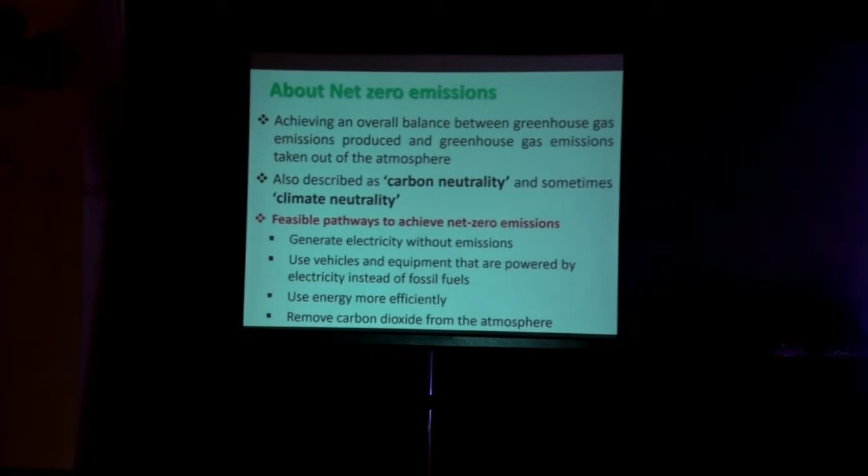This net zero emission is also as important as the energy and production scenario, and presently it is more important to know about the energy net zero emissions. Here I have covered the global and national level of this net zero race. Net zero emissions means achieving a balance between the GHG emitted as well as taken out from our atmosphere. This is usually described as carbon neutrality.

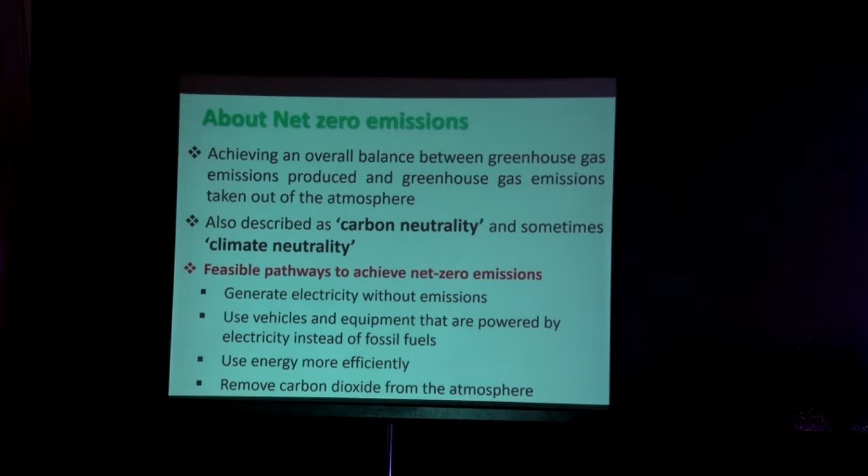We can achieve this net zero emission by some 4 ways, like generating electricity without any emissions, using vehicles and equipment that are powered by electricity without fossil fuels, using energy more efficiently, and removing the carbon dioxide from the atmosphere.

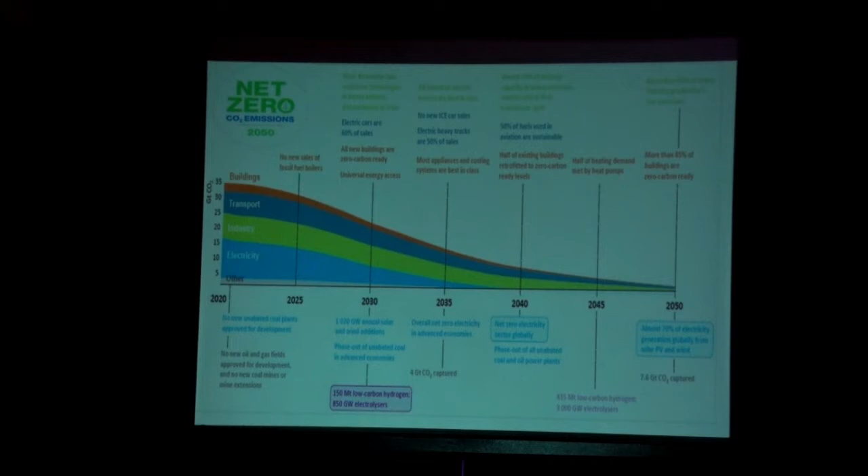By 2030, low emission technologies in heavy industries will come - electric car sales, and the production of solar and wind energy, and even electric motors, we will be using energy efficient ones. All these things will lead to net zero.

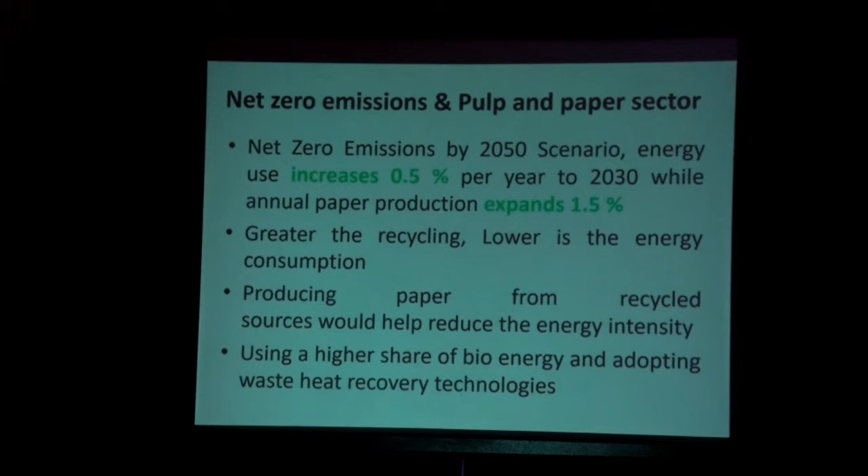Net zero emissions in pulp and paper sector: in this net zero emissions by 2050 scenario, energy use increases 0.5% per year to 2030, while the annual paper production expands 1.5%. Greater the recycling, lower is the energy consumption. By producing paper from recycled sources, it will help reduce the energy intensity. Using a higher share of bioenergy and adopting waste heat recovery technologies, we can achieve net zero.

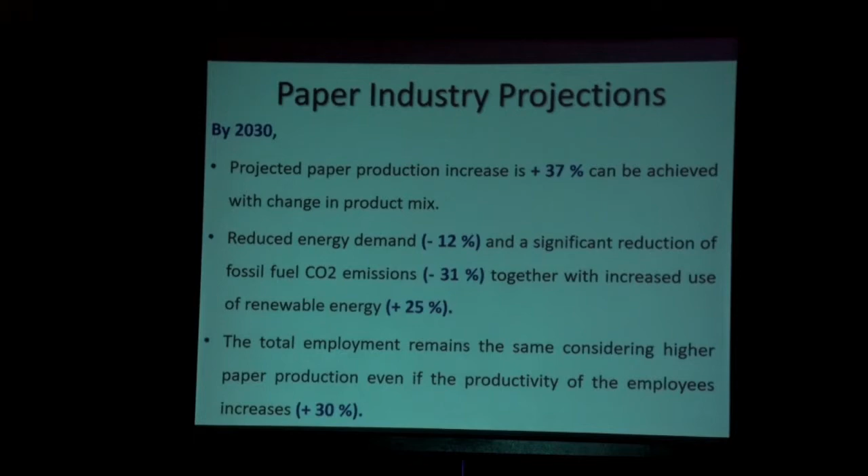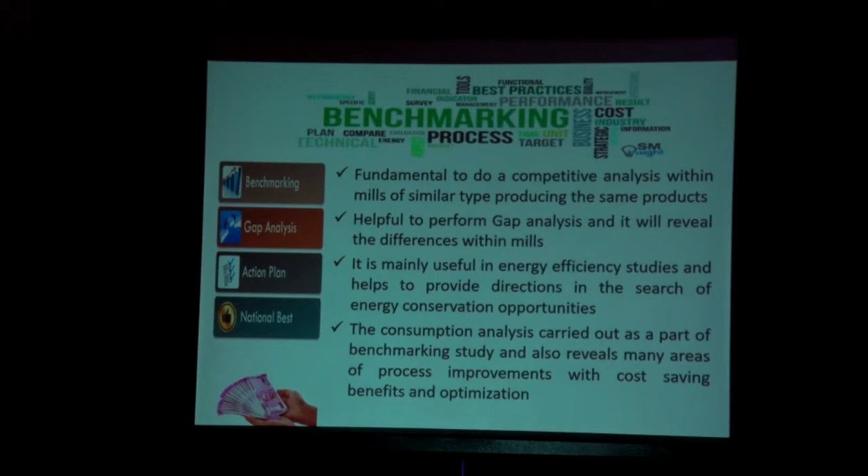So energy is a cost competitive as well as a controlled variable in any industry. So by reducing the energy, we can produce the products at a lower rate.

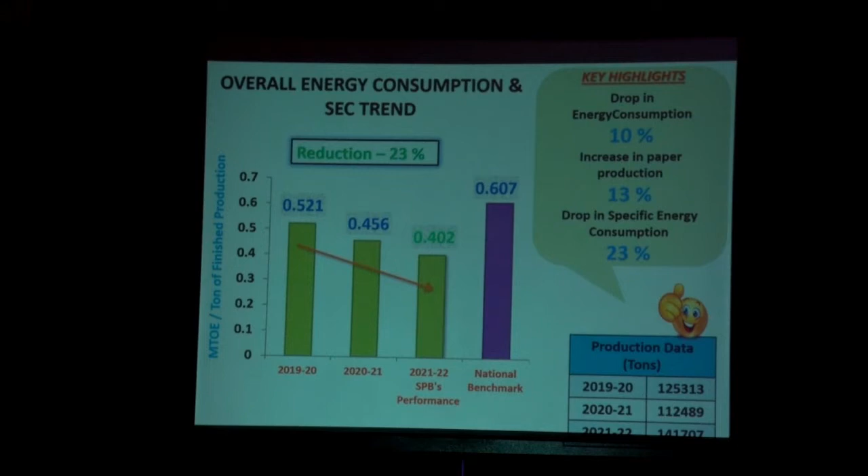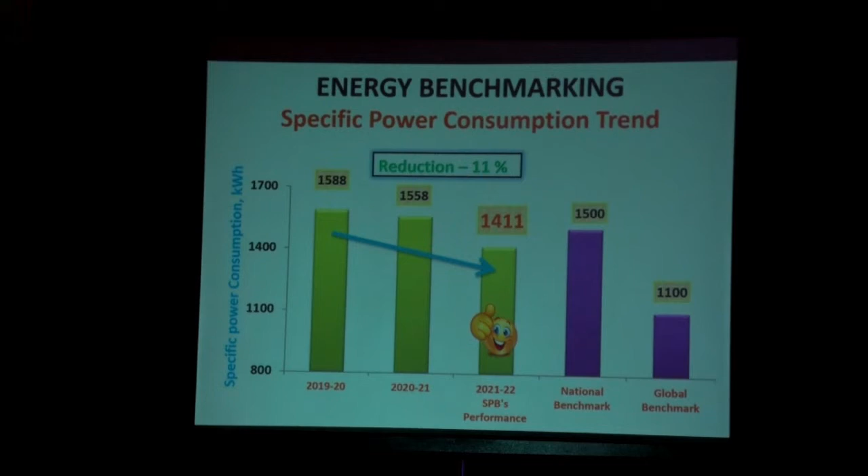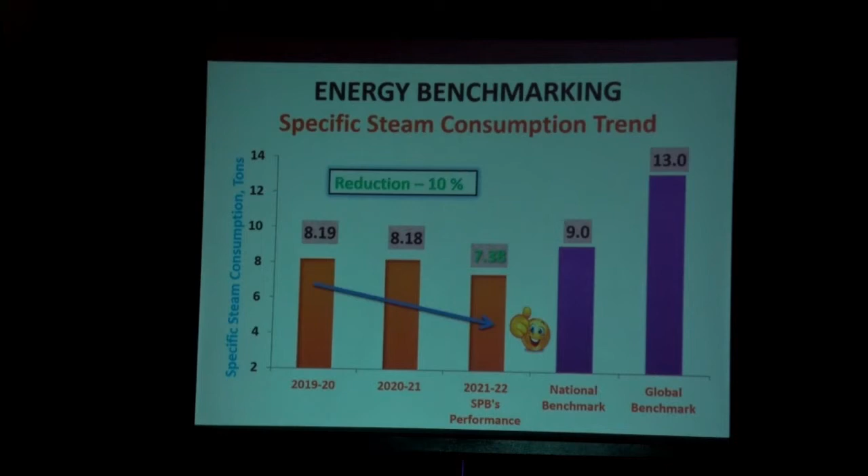Coming to the steam consumption trend, our national benchmark is 9 tons per ton of production, and globally it is 13 tons per ton of production, but ours is 7.38, compared to the three years data, which is about 10% reduction.

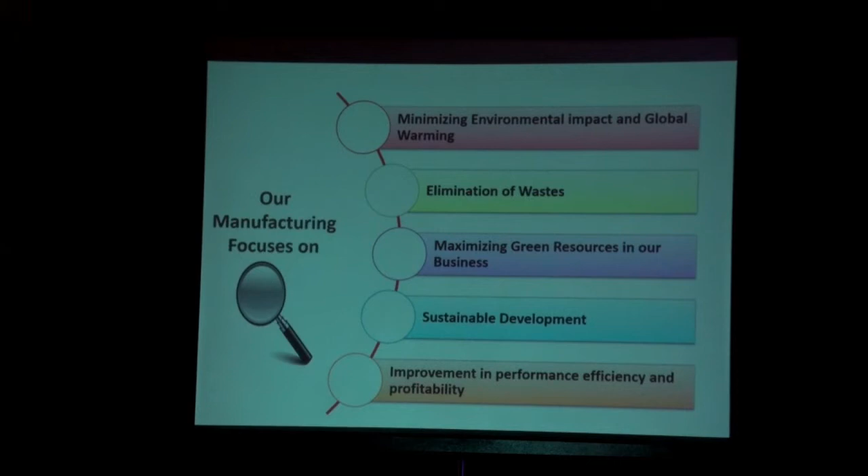Here to discuss some interesting case studies from SPB. Our manufacturing is focused on minimizing the environmental impact and global warming, elimination of waste, and maximizing the green resources in our business, sustainable development, and improvement in performance efficiency and profitability. Likewise, our approach towards energy benchmarking and net zero.

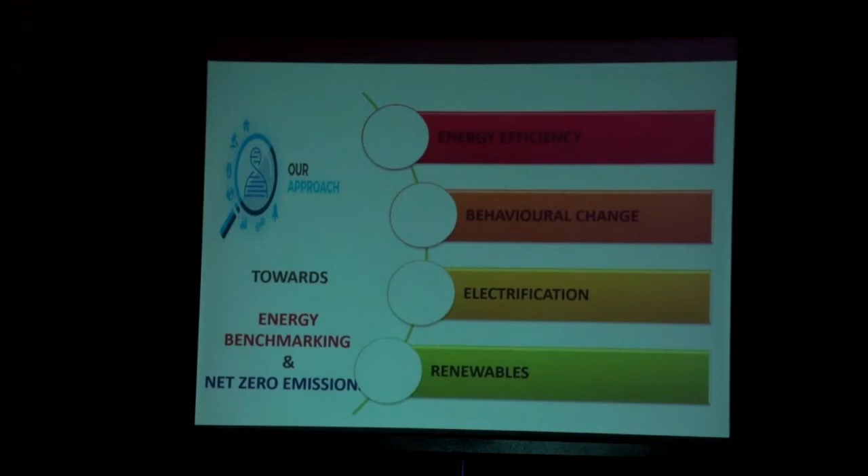These 4 themes we have taken in order to bring energy emissions to net zero. First is energy efficiency and behavioral change, electrification and renewables. We also have projects worked on these themes. The first is energy efficiency.

Energy efficiency - there are still opportunities for energy efficiency improvements and behavioral change, reducing excess wasteful energy use, transport mode switching, and material efficiency.

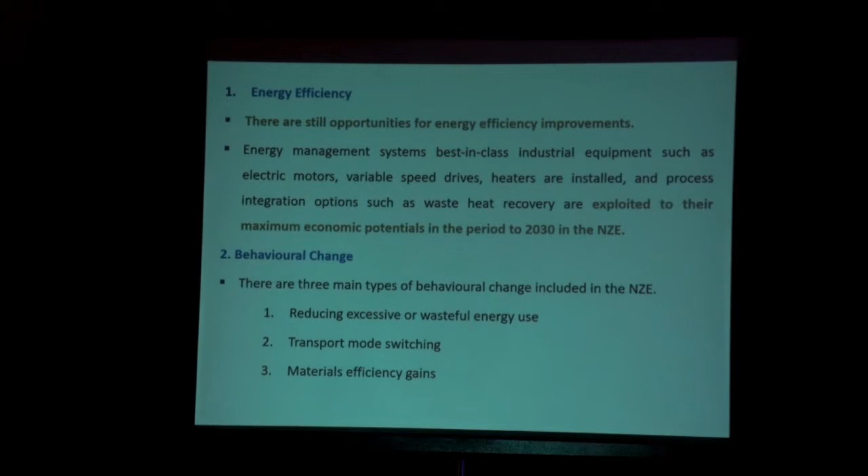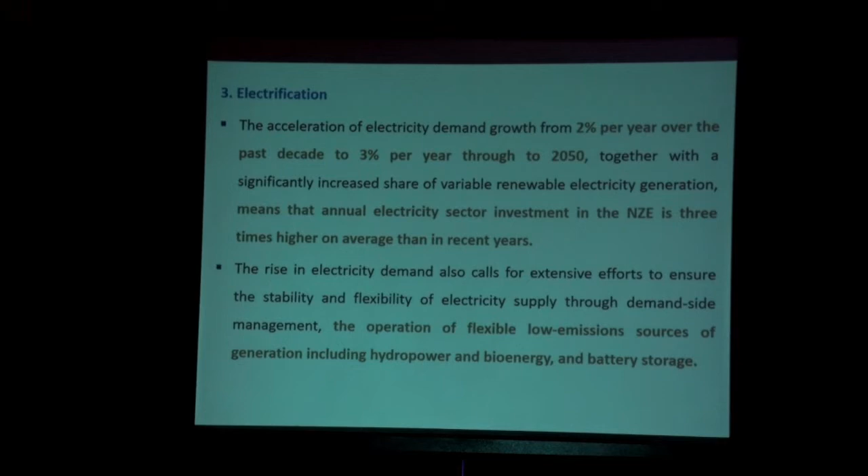This electrification, the acceleration of electricity demand from 2% over the past decade to 3% per year through to 2050. This will increase the share of renewable electricity generation, and we were also working on it.

Coming to renewable energy, from our pulp and paper sector, we have black liquor. It's one of the renewable energy sources that we can use in the pulp and paper industry.

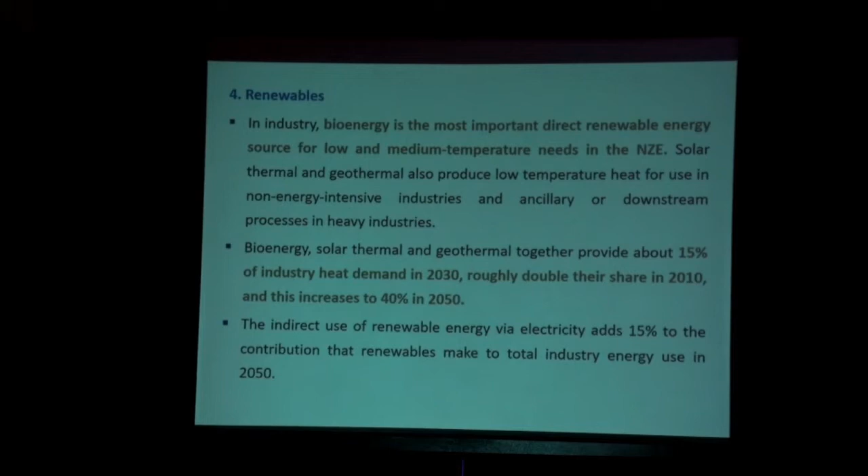So focusing on net zero emissions, we have certain targets and energy management systems by monitoring our projects, and we make process and resource efficiency improvements, and we are looking into our environmental performance and sustainability.

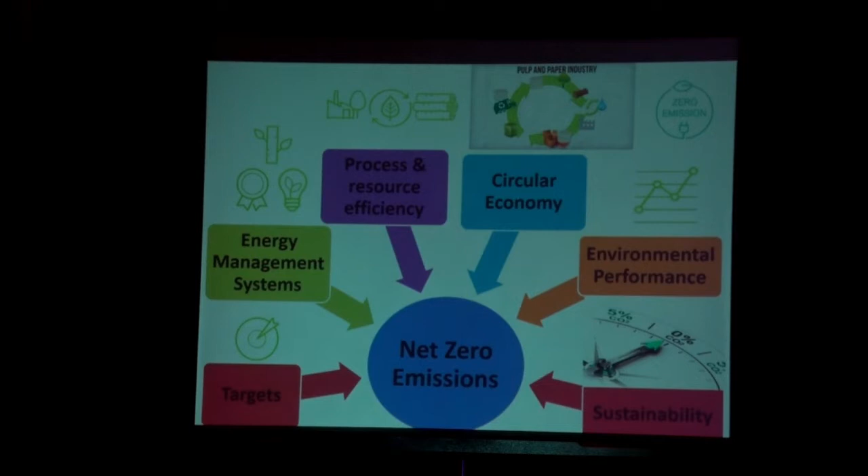On the right side of the column, I have taken 5 interesting case studies which work on the theme of energy efficiency and renewables. For energy efficiency in the thermal part, we have 2 case studies.

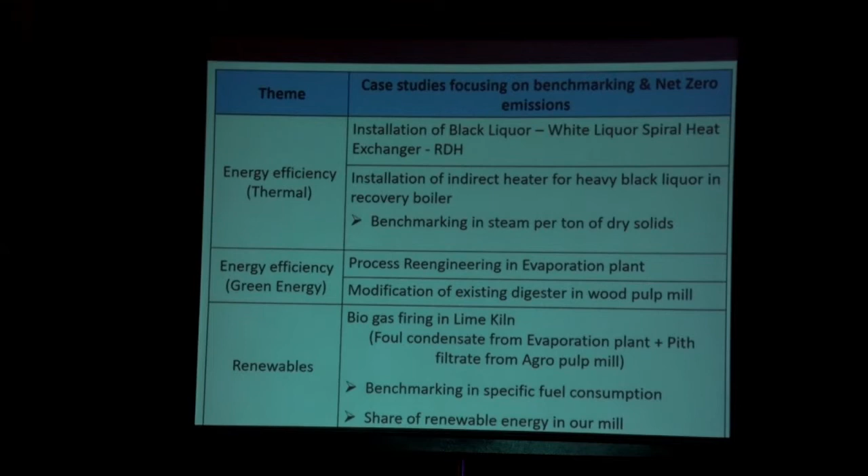One is installation of black liquor, white liquor spiral heat exchanger in RDH. The next one is installation of indirect heater for heavy black liquor in recovery boiler. The third one is process re-engineering in evaporation plant. Fourth is modification of existing digester in wood pulp mill. Fifth is biogas firing in lime kiln. We will see them one by one.

The first case study is the installation of black liquor, white liquor spiral heat exchanger in RDH. Earlier, white liquor supplied from the chemical recovery plant was about 60 to 70 degrees Celsius. They used a shell and tube heat exchanger for heating up to 100 degrees Celsius only, but even then the requirement was about 120 degrees Celsius. So we went for a spiral heat exchanger.

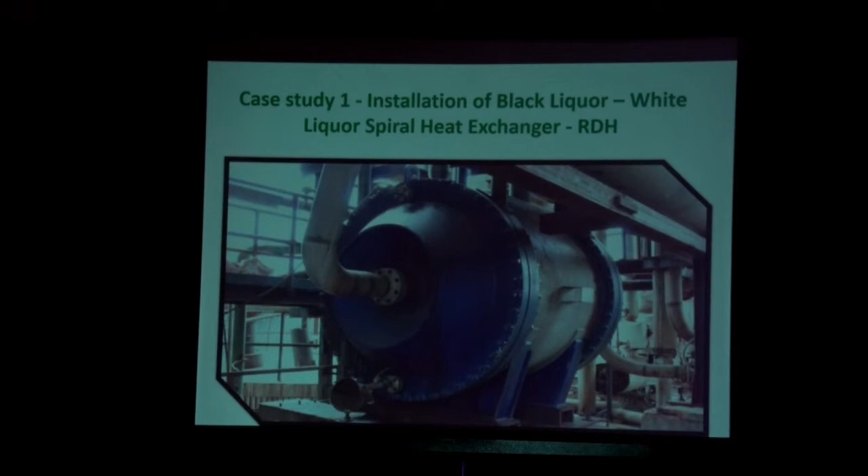The spiral heat exchanger, due to its continuous countercurrent flow, has a high heat transfer rate. So with the increase in heat transfer, we can exchange heat between black liquor and white liquor. Earlier, the black liquor supplied to the chemical recovery plant was about 90 degrees Celsius, but after installation of the spiral heat exchanger, it is now about 82 to 83 degrees Celsius only.

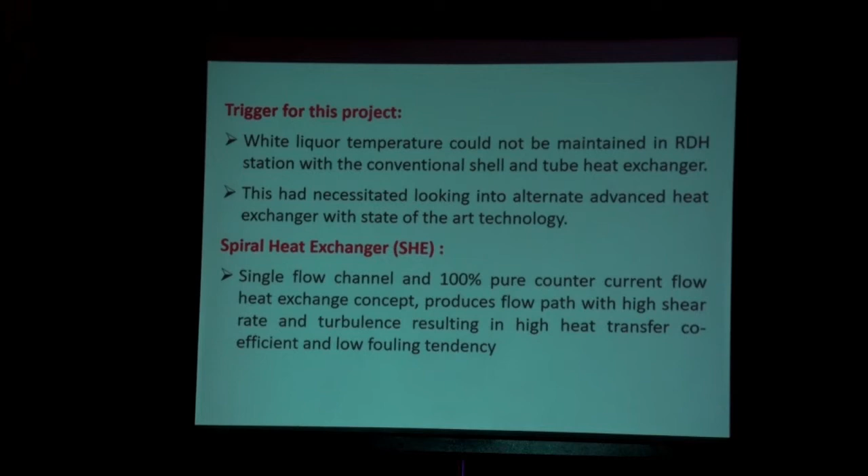Again, this heat is being utilized by the white liquor. With white liquor supplied from chemical recovery and the black liquor needing to be supplied to chemical recovery, both heats are exchanged using the spiral heat exchanger, which gives 100% pure countercurrent flow, resulting in these performance highlights.

Earlier, the white liquor outlet temperature was about 100 degrees Celsius only. After installing this spiral heat exchanger, it came up to 120 degrees Celsius. Again, the WBL supplied to the chemical recovery complex was earlier 90 degrees Celsius and is presently at 82 degrees Celsius only.

So we may know about the 3 T's of combustion: temperature, time of mixing, and turbulence. Now these 3 T's are not only for combustion purposes - mill-wide, we can think over it and implement it one by one on anything regarding these 3 T's.

Here, in the spiral heat exchanger, we have attacked the turbulence T. Due to the continuous countercurrent flow and the high shear rate, turbulence is created. The higher the turbulence, the higher the heat transfer coefficient, and this heat exchange is good.

So the WBL temperature we have reduced up to 82 degrees Celsius, which helps the recovery plant a lot. These are the outcomes of this project: steam savings achieved of about 25 tons per day and cost savings of about 46 lakhs.

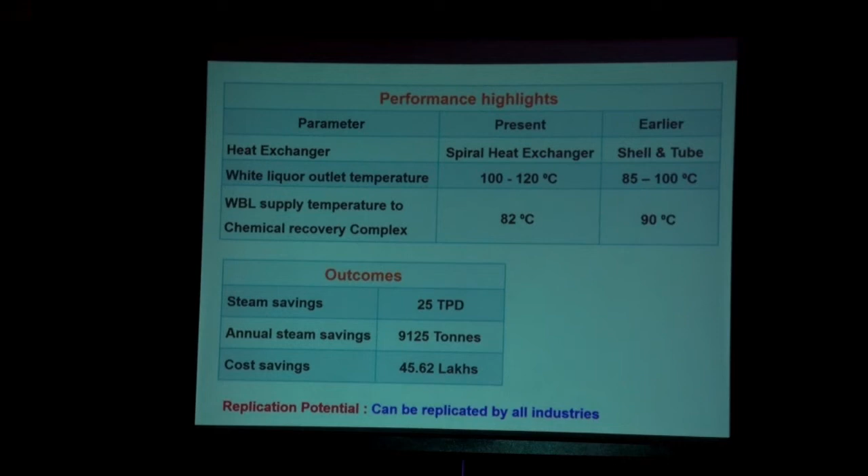With that, we will increase the black liquor temperature up to 130 or 132 degrees Celsius by direct heating. This direct heating uses MP steam, which means we are directly adding condensate to the black liquor. This can be avoided by means of indirect heating.

So we have installed a new MP steam indirect heater for heavy black liquor. Earlier the heater gain was around 5 degrees Celsius only. After installing this MP steam indirect heater, we are getting about 10 to 12 degrees Celsius, so that we are able to raise the temperature of black liquor to around 130 degrees Celsius, with maybe the rest 1 or 2 degrees Celsius by direct heating.

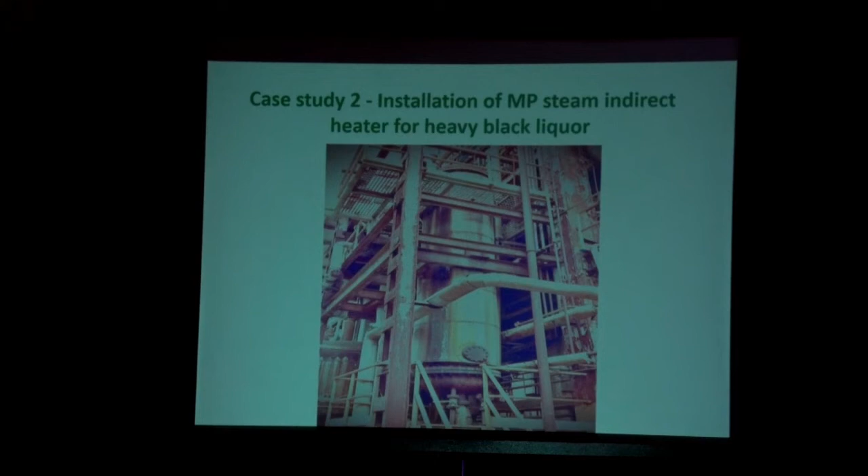So this will directly affect the flue gas volume. So this made the trigger for this project.

This heavy black liquor is heated with direct and indirect heat exchangers. Earlier it was an LP steam indirect heater. Presently we have installed an MP steam indirect heater. This will raise the temperature up to 130 degrees Celsius. This MP steam directly entering into the boiler can be avoided.

Can you finish within 5 minutes? 5 minutes now.

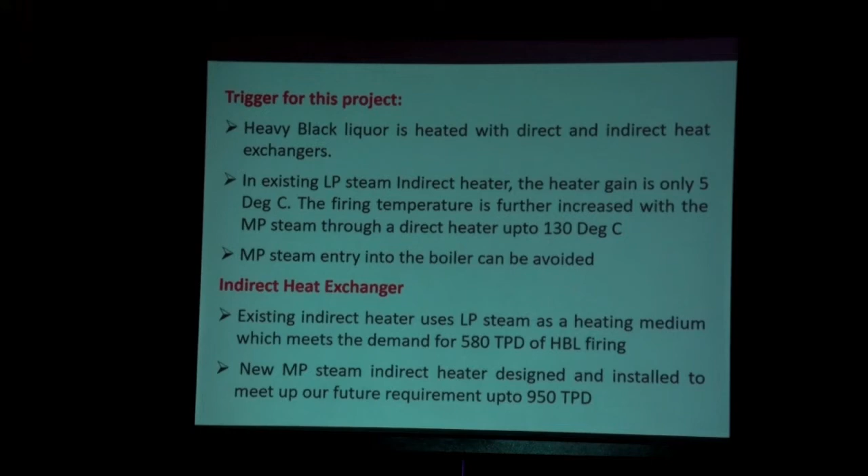Also keeping in mind our augmentation of the recovery boiler to about 950 tons per day, this MP steam indirect heater is helping a lot. Presently our HBL firing is 950 tons per day. This gives extra steam generation of about 0.1 to 0.15 tons per ton, so with about 95 tons per day extra steam we are producing.

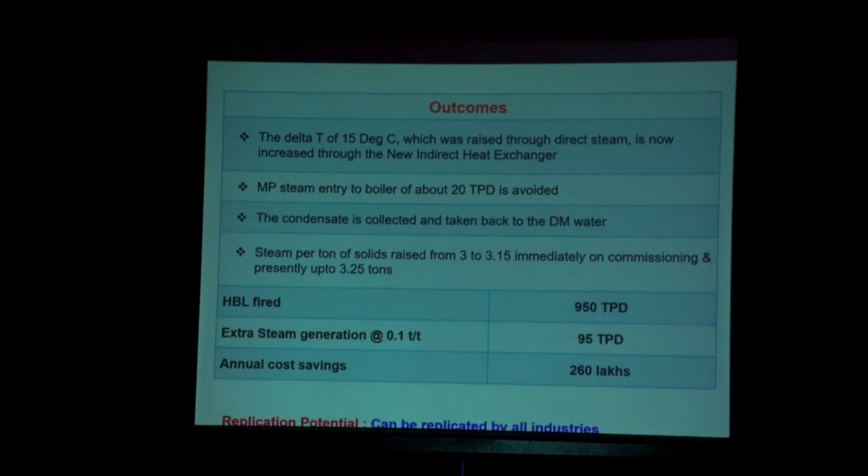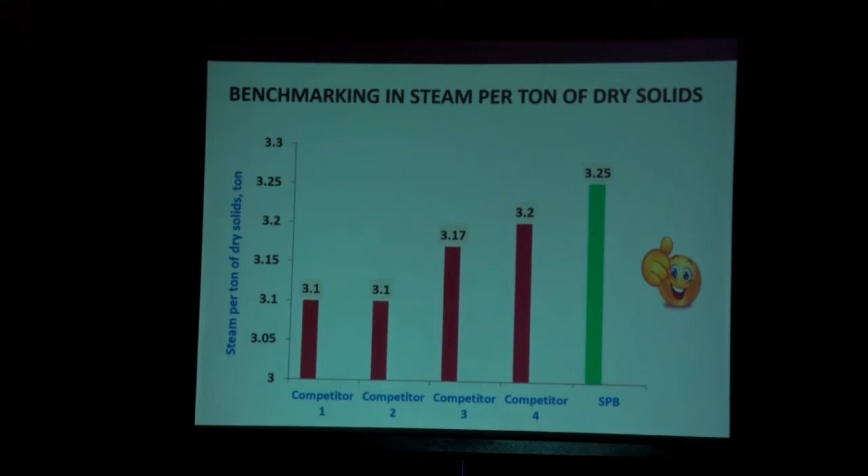This gives the benchmarking in steam per ton of dry solids fired. Since we have some values from our competitors, our SPB is about 3.25 tons per ton of dry solids fired.

Next, coming to the third project, this HBL generation is slowly increased in a phased manner: phase 1, phase 2, and phase 3. The first phase is shifting of ash crystallization and diversion of vapor from PCFT1 to the calandria 3 vapor header, phase 2 is running the second effect in parallel mode, and phase 3 is the digester modification.

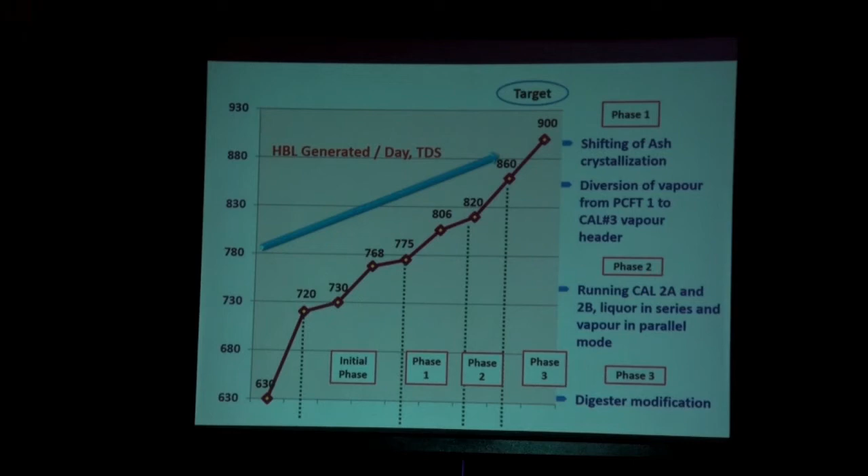So with our in-house team, and not going into capex projects, we brainstormed ourselves and looked into the project. Even our OEM supplier recommended going for a major investment, but we debottlenecked our evaporator and made it run to meet the demand of 850 tons per day.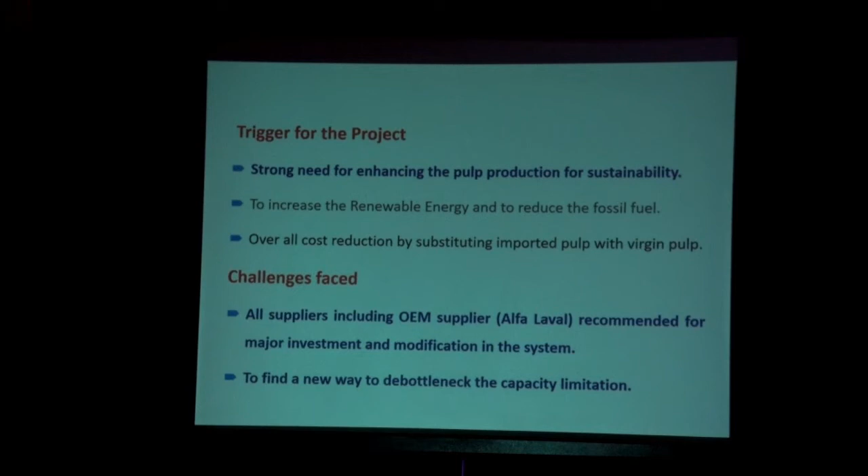So in phase 1 we have the first shifting of ash crystallization. Earlier we used the ESP ash into the second effect. Next we added the ESP ash into our first effect.

Earlier the tube jamming was about 800 to 900 tubes. But after shifting this ash crystallization, the tube jamming itself has come down to some 200 tubes, and the tube cleaning frequency, earlier once in 30 days we used to clean the tubes, but after this project it was increased to 2 months.

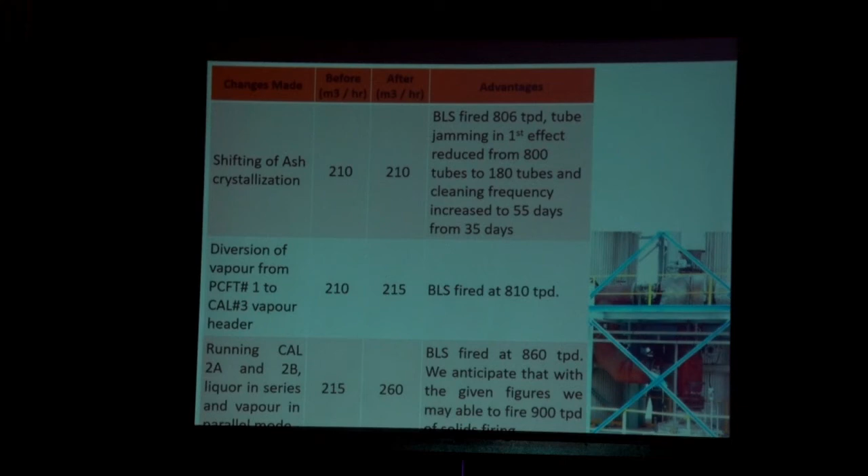After phase 1, with the diversion of vapor as well as the shifting of ash crystallization, we were able to run about 215 m3 per hour of WBL, and after phase 2 we were able to run 250 m3 per hour of WBL.

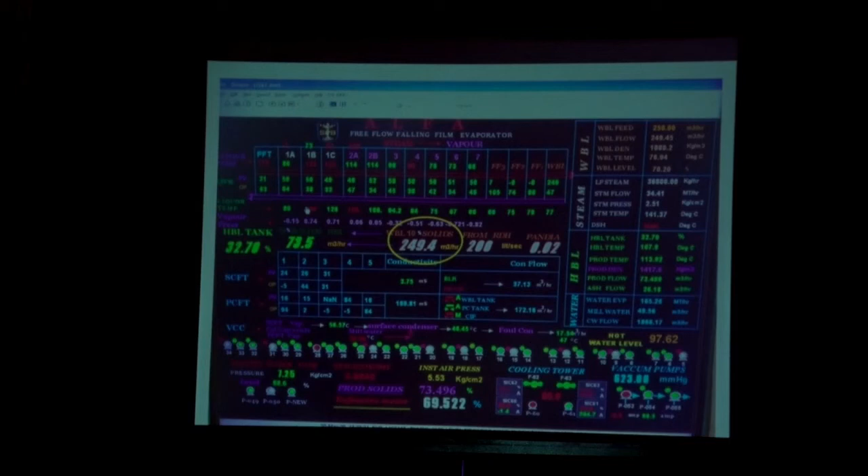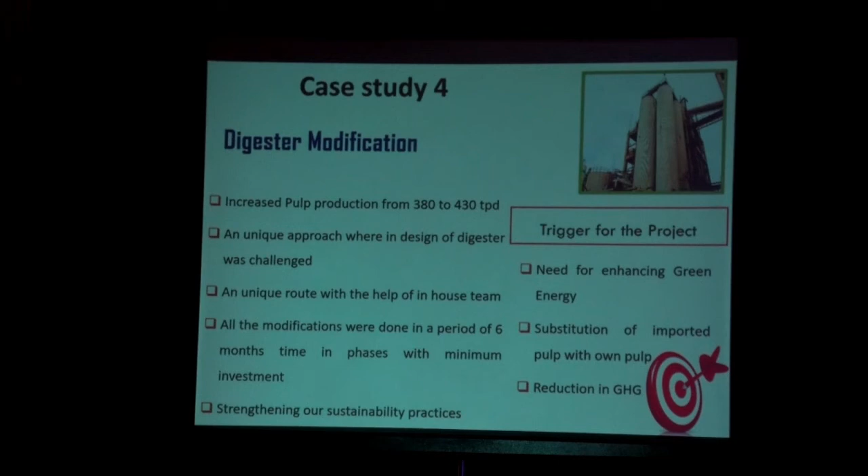Once this debottlenecking in the evaporator was completed, we entered into digester modification. This digester modification was done in 3 parts.

Earlier we had air evacuation at the bottom of the digester. We introduced one more line from the top and connected it to the same air fan, so that once the chips fill up, the excess air is removed through the air fan from the top also.

So this reduces the chip fill time by 7 minutes, and also the chip fill quantity of the digester increased by 1.5 tons.

In the second picture, we have introduced one more valve and a line to the same existing fan. This improves the air evacuation in one digester. We have implemented it in only one digester, and that is working good.

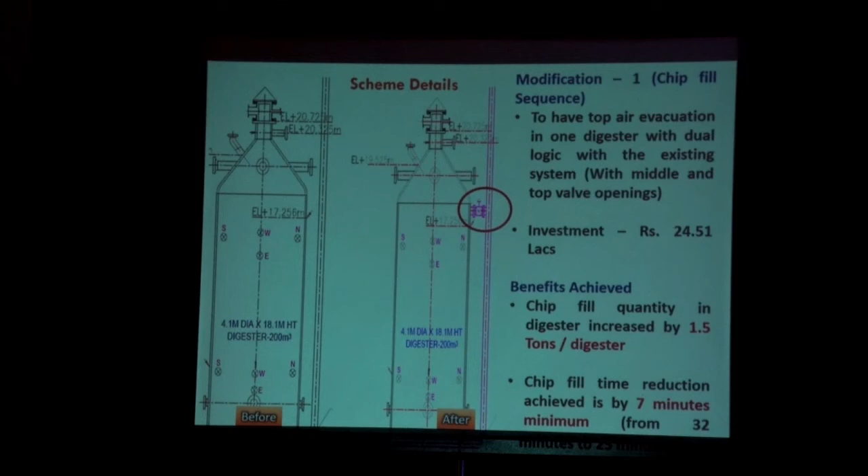In the middle portion, the liquor header circulation was earlier about 12-inch diameter, then we replaced it with 16-inch. That pump has the capacity to have a more circulation rate, so we increased the diameter up to 16-inch. This also increased the circulation volume, and the TTT cycle time has reduced by 15 minutes per cycle.

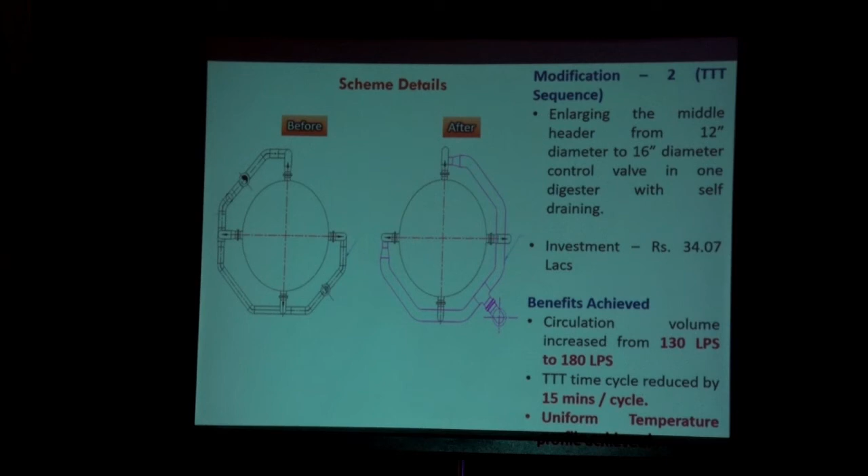Mostly in digester, we adopt the 3T concept. Here it is time.

Finally, in the pump out stage, the enlargement of the discharge line nozzle from 300 mm diameter to 500 mm. This will increase the pump out in one stroke.

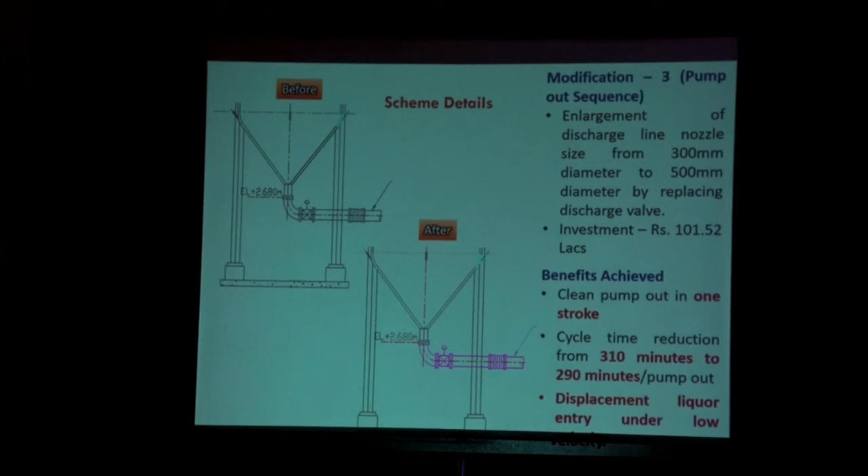The cycle time reduction from overall doing all these things has reduced from 310 minutes to 280-290 minutes per pump out. This is a major modification we have done in our digester, which helps a lot in firing 950 tons per day, and also the increased pulp production is about 30 to 50 tons per day.

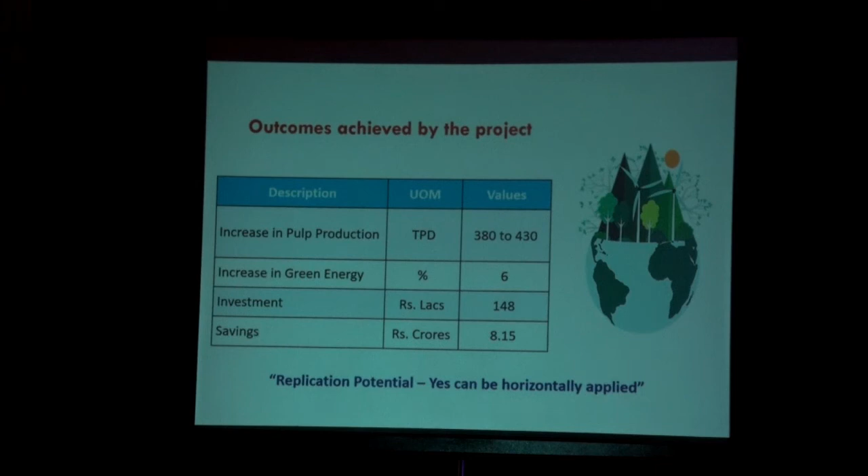The final, fifth case study is this biogas firing in rotary lime kiln. This biogas is being generated usually with the bagasse pith filtrate only.

We have tried with foul condensate also, which has the potential COD. It can also be used for generating this biogas, but we have to take care of the H2S content. This can be reduced by the addition of ferric chloride, and it is low.

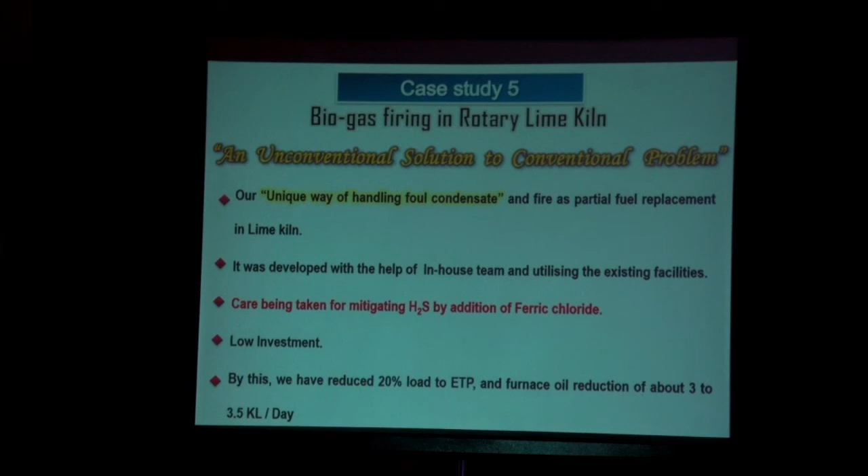By doing this, we have reduced the furnace oil by 3 to 3.5 KL per day. Also, this organic load to the effluent is also minimized.

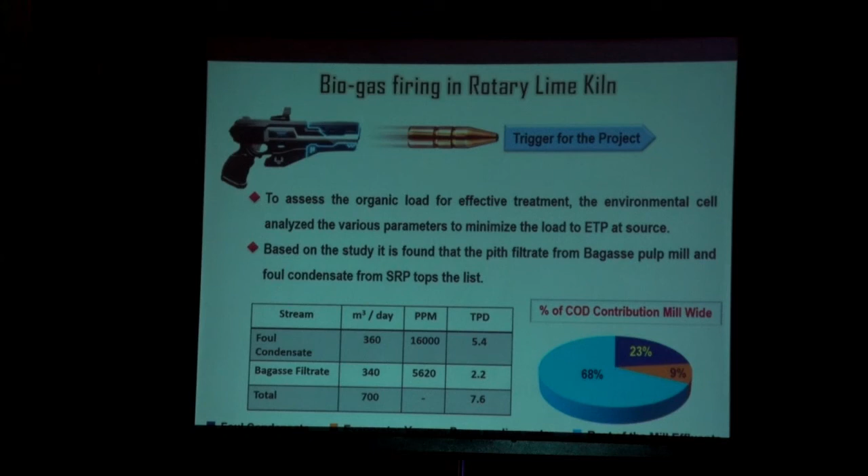Here, this table shows the quantity of foul condensate generation, bagasse filtrate generation, and the total contribution of COD.

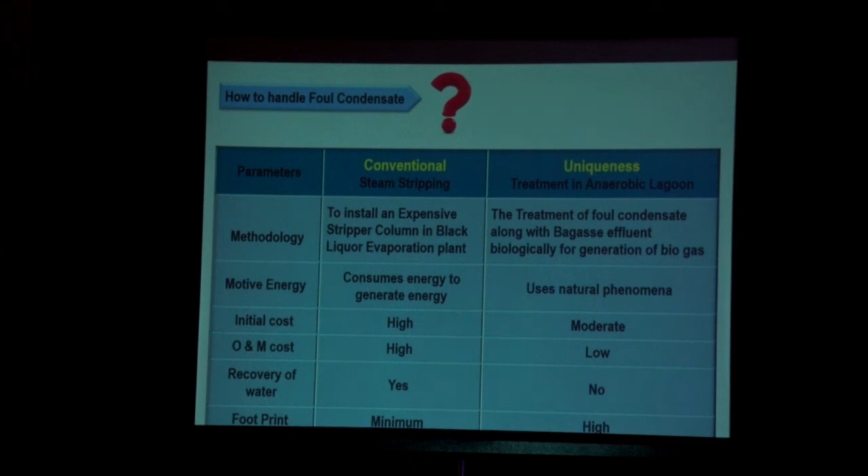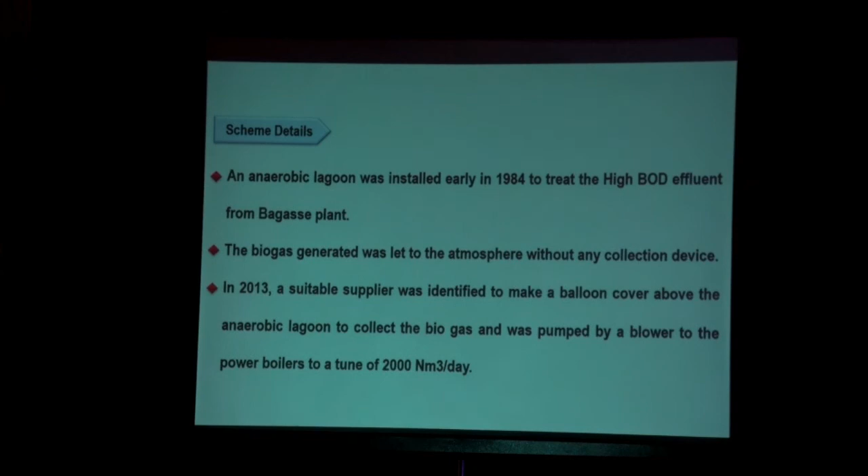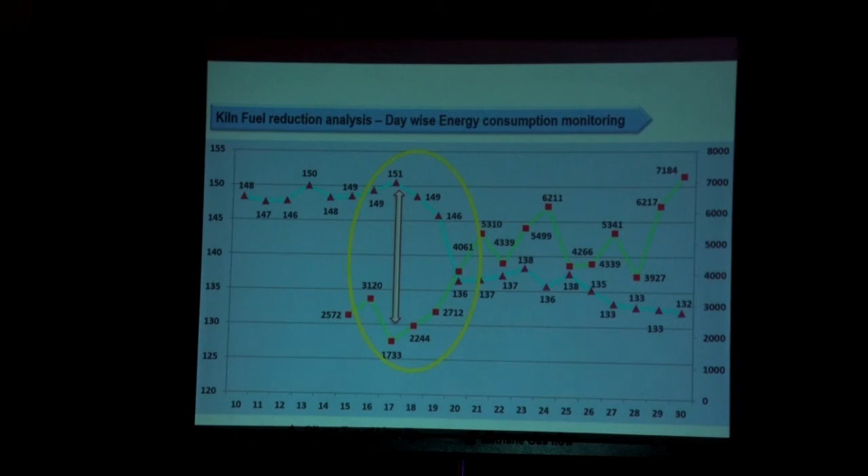Without any co-fuel like biogas, our oil consumption per ton is about 148 kg per ton. So we have reduced about 20 to 25 kg per ton of oil.

This is the benchmarking of specific fuel consumption. We compared with some competitors, and SFC is about 148 kg per ton of lime production. This is with 100% furnace oil.

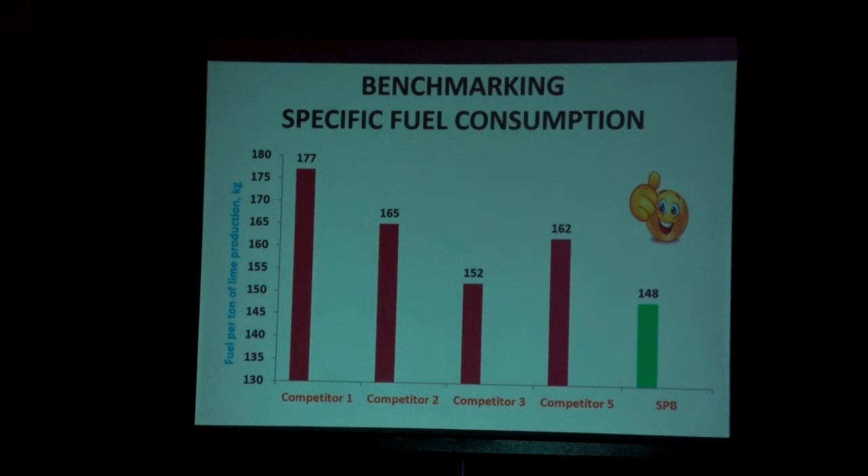With the biogas, we were around 125 kg per ton. This furnace oil reduction of about 3 to 3.5 KL gives a savings of about 8.15 crores.

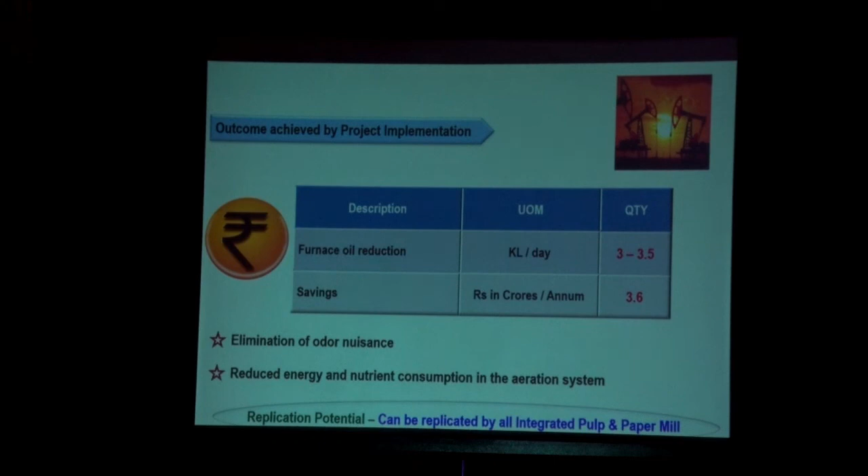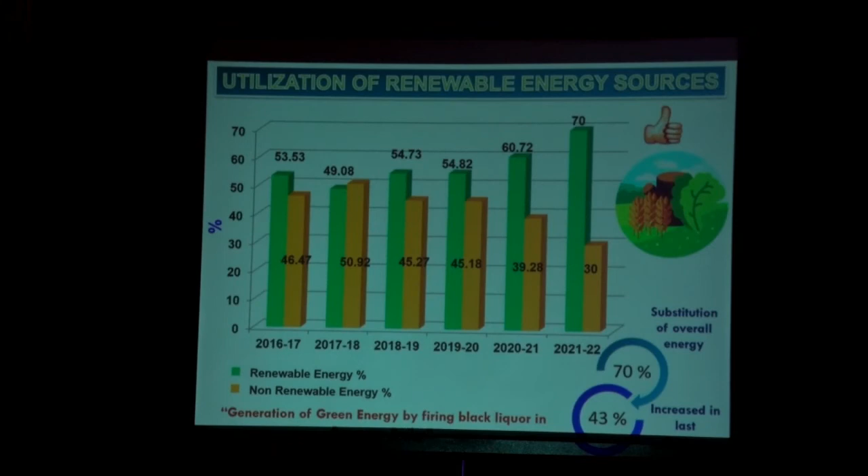So these were the highlights from the case studies. From spiral heat exchanger, 25 tons per day of steam we were saving, and from the MP steam indirect heater, this green steam generation of 95 tons per day, and also power was raised up to 2 megawatt.

By the process re-engineering in the evaporation plant, we have a 5% increase in the renewable share. Digester modification gives pulp production of about 32 tons per day increase, which will also contribute 4% increase in the renewable share.

Usage of biofuel to reduce fossil fuel consumption in CPP gives 40 tons per day of coal reduction, and the biogas usage in lime kiln gives 3.5 tons per day of furnace oil reduction.

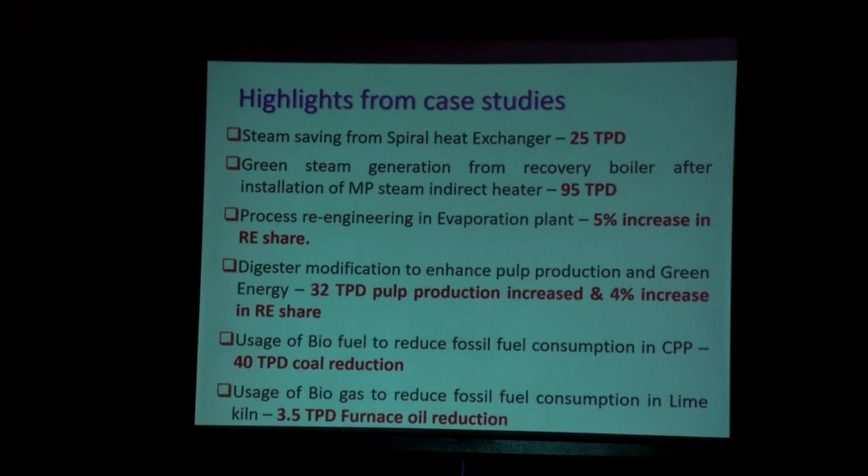These are some of the future projects towards net zero emissions. We have an in-situ PCC plant.

Once we make this PCC plant, the carbon emissions from the transportation part will come down. So we have a PCC plant, and we are planning to increase the bioenergy and group captive solar power.

And the present doubling of bagasse pulp production - we are about 10 to 15% of bagasse pulp production, and we are going to double it.

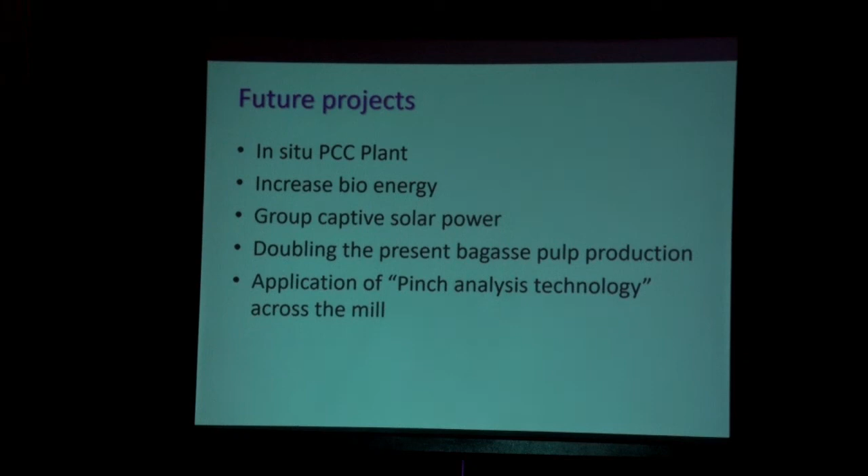And the application of pinch analysis technology across the mill. This will save the energy where we were losing it, and will bring energy conservation opportunities.